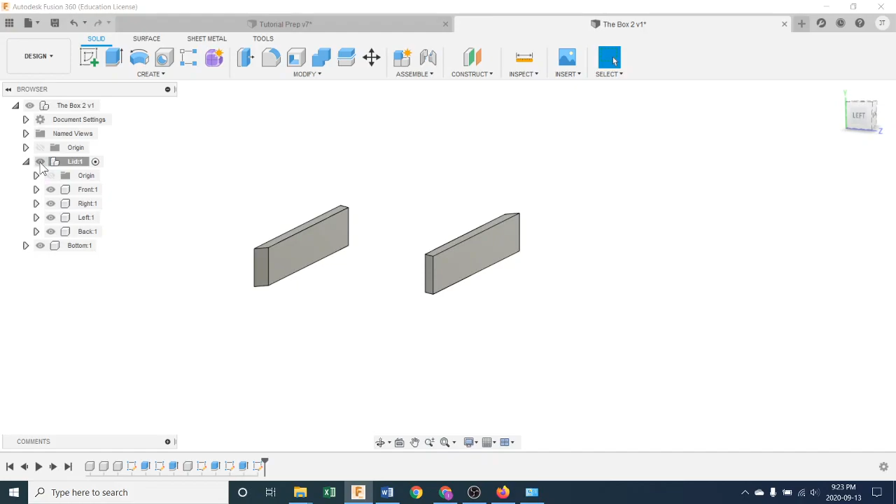Notice we have everything visible. If I turn off the lid, everything's gone, but that wouldn't be good because I wouldn't be able to see what I want to draw, which is the left side. So I better leave that on. What if I turn off the front? It's gone. What if I turn off the back? It's gone. I'll keep the left on and the right on, because that's what I'm working on.

So left, let's make it active because you want to draw on the active. Notice my view cube up here, let's put it in any position we want. I can see certain sides of the view cube. Here's the right side, but I can't see the left side, so let's draw the one that I can see. I'm going to go make the right hand side active, and you'll see why in a second. Now I'm going to create a sketch.

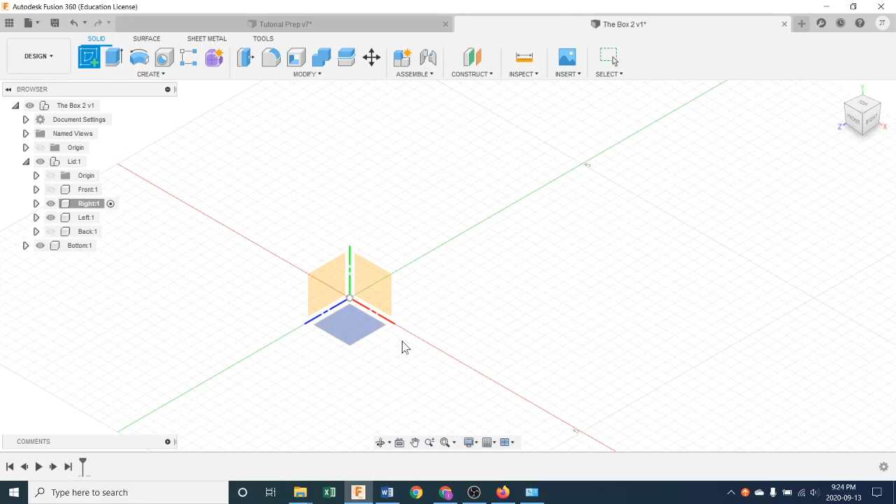This will be my rectangle extruded 45 degrees, so I'm going to go a lot faster this time. The sketch is going to be on the side that lines up with the right side of the box, which is this one here. Bonk, and now we are going to go create a rectangle.

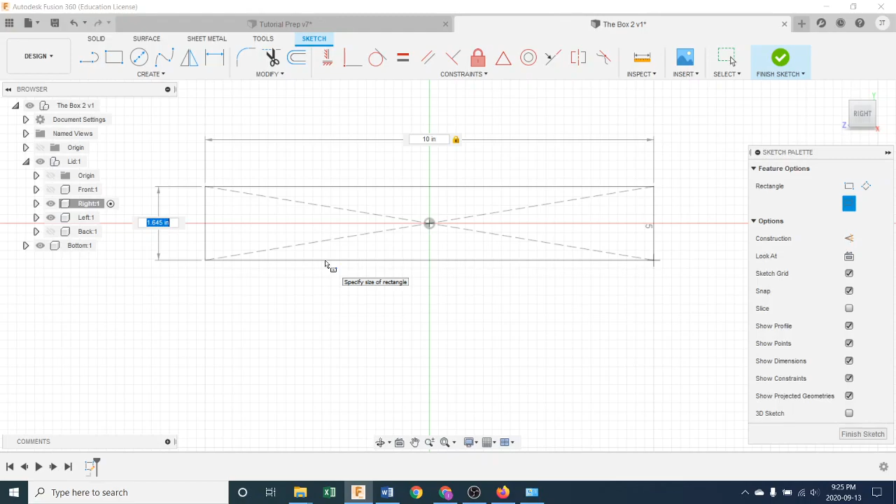It's a center rectangle just like last time, we're going to drag it out. My box has to have the same length, it's got to be 10 inches like it was before, so I'm going to hit tab and go 10 inches. It also has to have the same height. So the height was, I can't remember, I better go back and check, so I'll check that in a second.

1.25. I think right now you might be screaming at me if I got it wrong. So I've made a few of these boxes, all different heights, so there's a 1.25 inch high box. Now I'm going to extrude this out, the requisite 0.375, not an option, everybody does that.

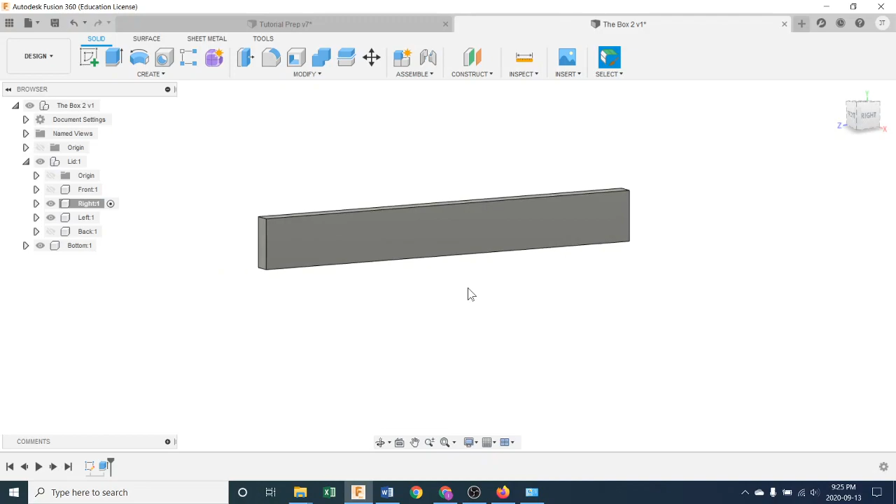And then I'm going to create a sketch on the top. See, it lines up the top surface of this, and it rotated on me, and I don't love that. So I'm going to go up to my view cube and see how I can rotate it around using these arrows. I'm going to bring it back. Actually, I'll do this, I'm going to look at it from doghouse view.

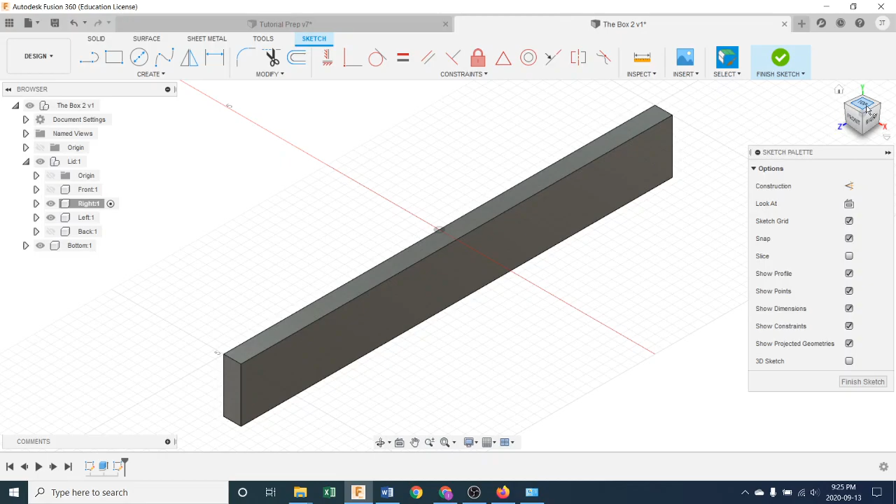I would like to sketch on here, which I am, but I want to make my lines go this way because I know I'm on the right hand side. It won't matter in the end. Whoopie-doo, we can spin stuff around if we have to. I am going to go back to the top, and rotate it this way. Boom, and now we're going to create a line just like we did last time.

It's got to be 45 degrees out, so we hit tab, 45, enter. Now we'll do another line, hit an L on the keyboard to speed things up, going this way, it's going to be 45. Oop, wrong one, that's the length of the line, maybe make that 2 or something like that.

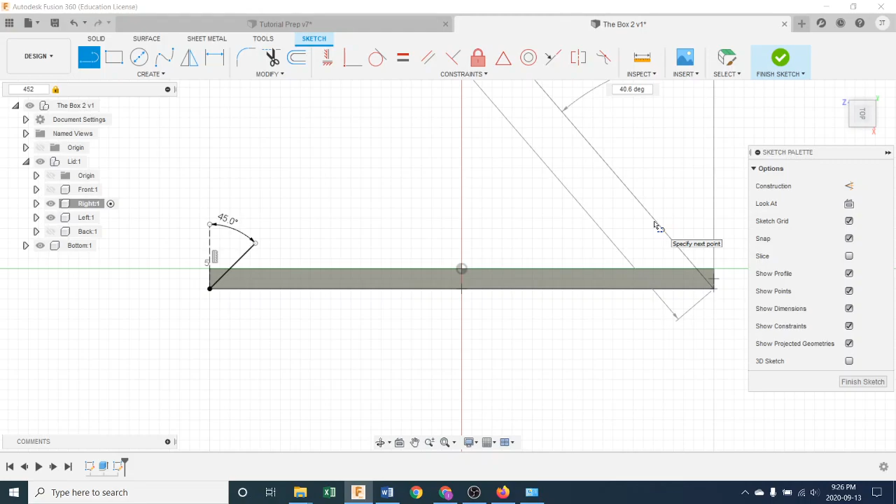I don't know where it went, it's way out there because I made it 45. Look at it out there, that's crazy. Let's make it 2. There we go, it's better. Zoom, zoom, zoom. Alrighty, and then we'll hit tab to make the angle box active, 45, enter.

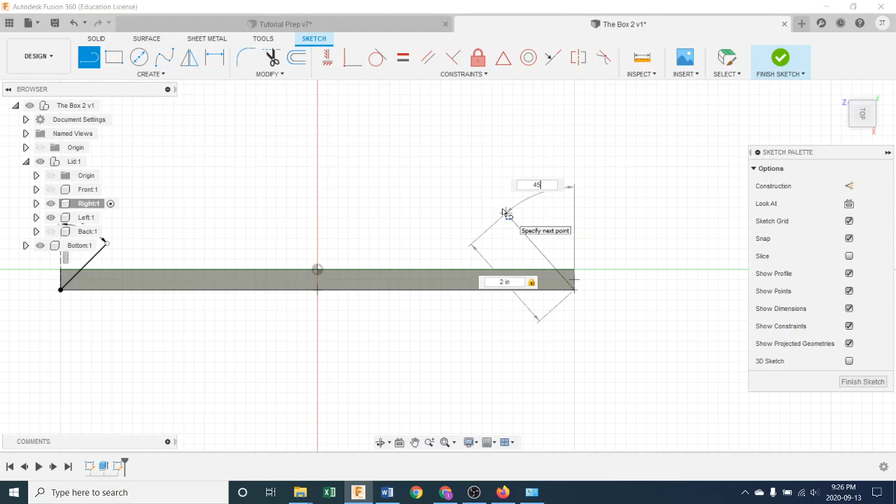Okay, now what are we doing? Remember we trimmed these to make them neat and tidy, so we'll trim. It goes red to show me what's going to be trimmed. Hit escape to get rid of the little trim command. See, I'm going much faster than the last video.

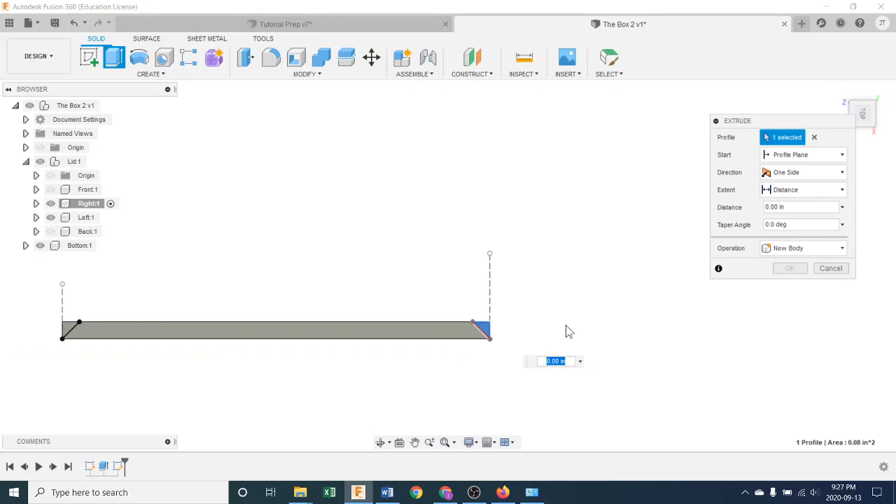We're going to click that, and we're going to click that, and we're going to extrude these, and I can't see my little extrusion arrow. Better get that one. Oh yeah, you hold shift when you click them both, otherwise you'll not get them both. Now we're going to go down, and now we're going to go to, how far? To object, which is the other side of this thing. Push OK, so I've got this piece.

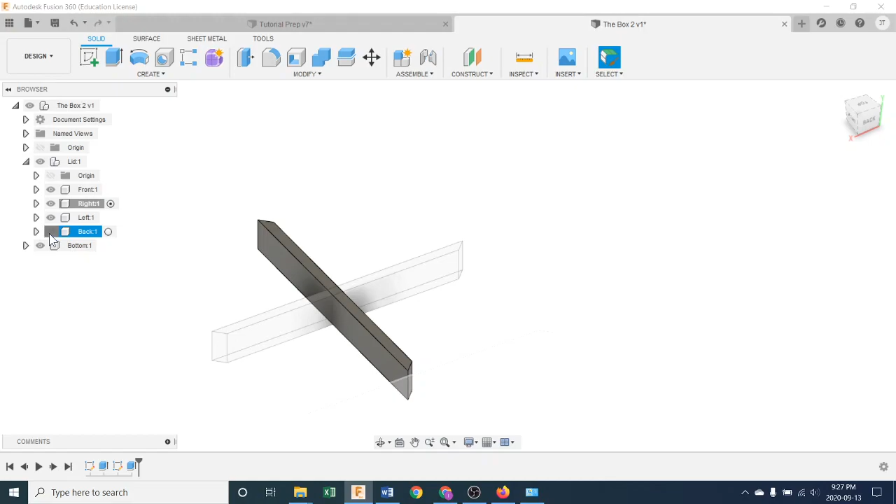Let's turn the other ones back on, the front and the back. Ooh, there it is. And this was which side again? This is the right side, right? So if this is the back right now, if I go doghouse, I'm looking at the front, this is the right side. See, you click and hold and you can bring it over.

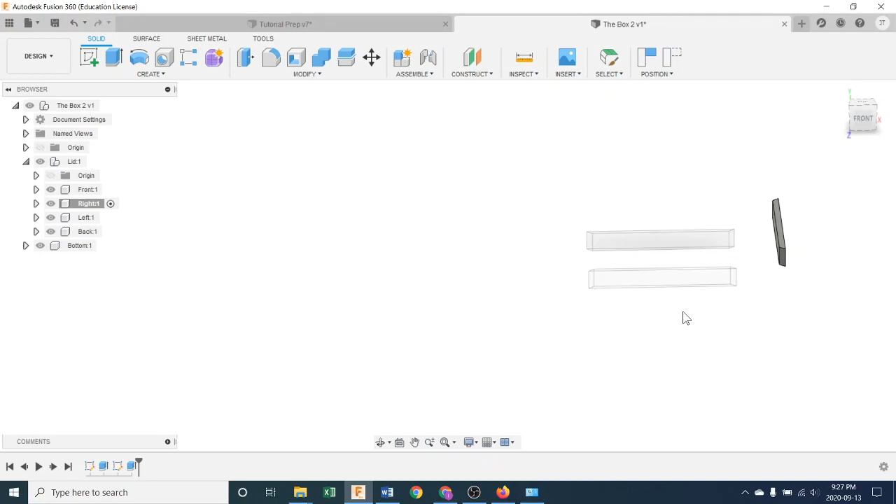So I'll bring it over. Now notice it's all over the place, like in space, I could have this one way down here and that one up there, but I'm just going to roughly click and move them around till they represent what they represent, so it's logical to me. Ooh weird, okay, good enough.

Now, how did we end up with a left side? Should we make another left side, or should we draw that all again? I could go to left, highlight that, and draw a left side, but wasn't it smarter to just get rid of that thing? Delete. And then what we're going to do is go to the right side, we're going to copy it.

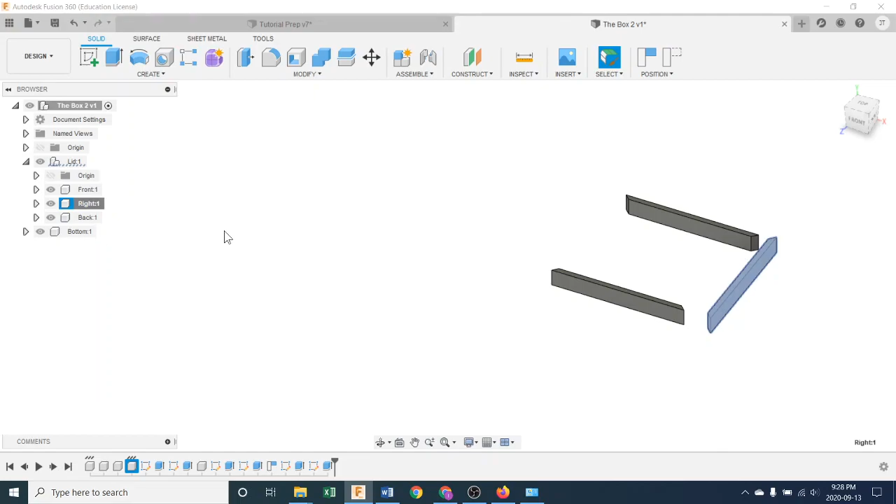And then we're going to go to the top lid so that we can have it paste underneath the proper, well, it should be underneath lid. And we're going to right click and go paste new, make sure paste new, not paste. There we go, and where is it?

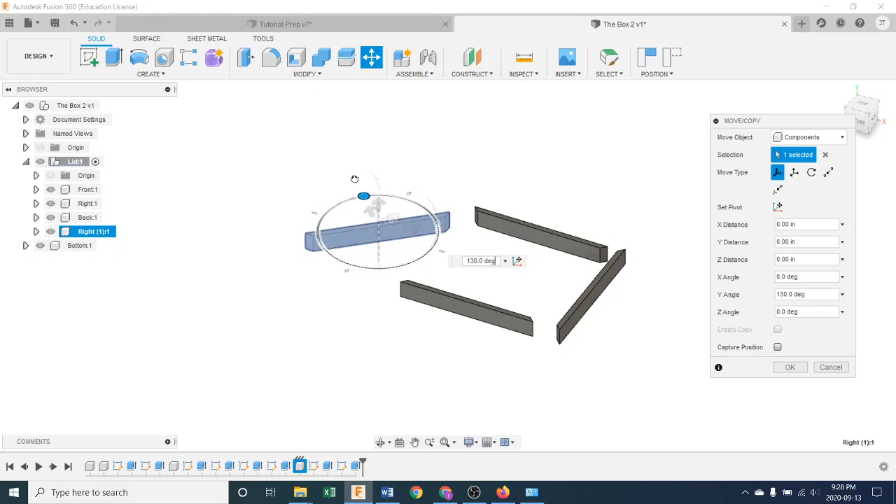It is there. So I'm going to push it over, and then I'm going to rotate it 180. Boom, boom, boom, there we are. And then we're going to hit capture position because we should. Push OK, oh boy, look at that, we've got all four sides of our box drawn.

This is fantastic, and what's the next step? Well, the next step is going to be joining these sides together so they stop doing all this nonsense, and that is the next video. Stay tuned, all for now.